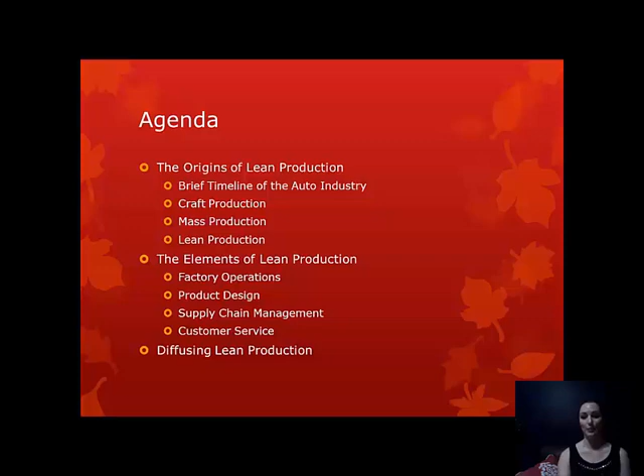The business model for these firms that were producing vehicles in the craft method was to have a central entrepreneur working with clients directly and then outsourcing each of the parts of the vehicle to small machine shops within the local geographic area, and then they would assemble all of those parts. These workers that actually built the different parts of the vehicle were very much highly skilled. Some of them went through apprenticeships and different things. A modern day example of craft production would be Aston Martin, very high-end, luxurious, handmade, high-quality product.

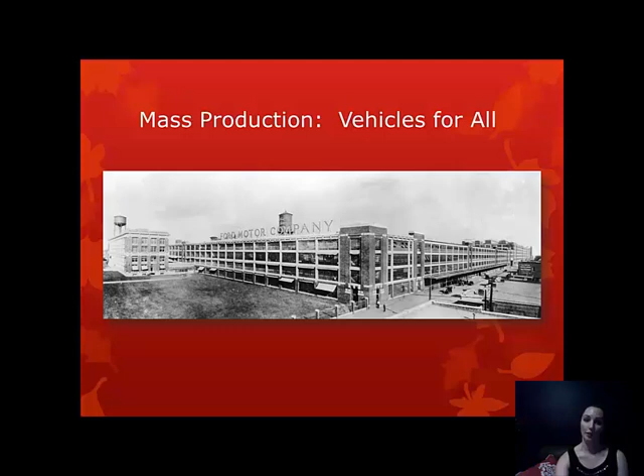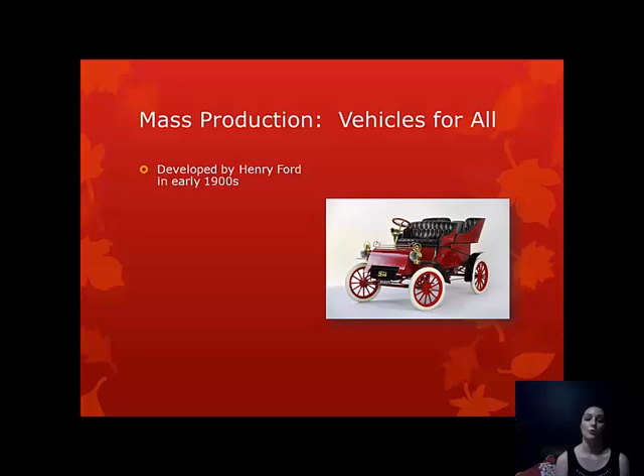So mass production came into play in the 1900s, and you can see this shot of Ford Motor Company in Highland Park. It was developed by Henry Ford, really, and here's the Model A, which deployed in 1903. And between 1903 and 1908, a variety of vehicles were developed, and finally we landed with the Model T that you can see here.

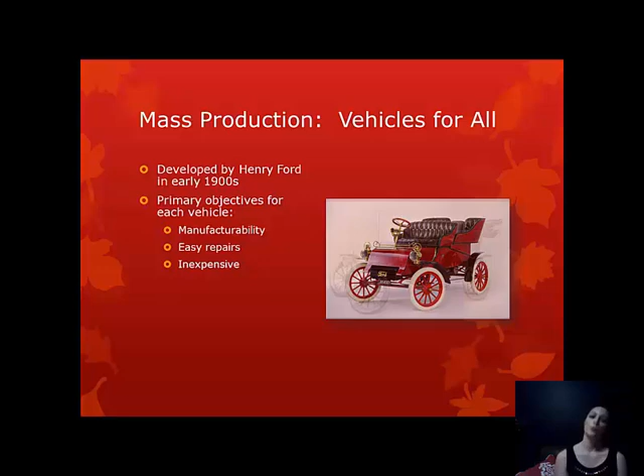The primary objective for vehicles that were created under mass production was manufacturability, so the ease of the workers being able to put the different pieces together instead of having to do a lot of skill-intensive work. Easy repairs for the user, so each vehicle came with its own little manual, and it was thought that anyone with their average box of tools could really just take out a couple, work on the car, and get it back on the road. Also, very much key is inexpensive. They really wanted to exploit the economies of scale and carry forth that cost savings to their customers. And they did that. Since the launch of the Model T in 1908, the prices dropped continuously.

Also, their business model, unlike craft production, is unskilled workers, considered interchangeable. These workers did not need any kind of special training. It was really more of a 3-minute training to know how to put one piece together with the other and move the vehicle forward. They did focus on quantity over quality, kind of a move the metal mentality, and a good enough attitude. So, origins of lean production.

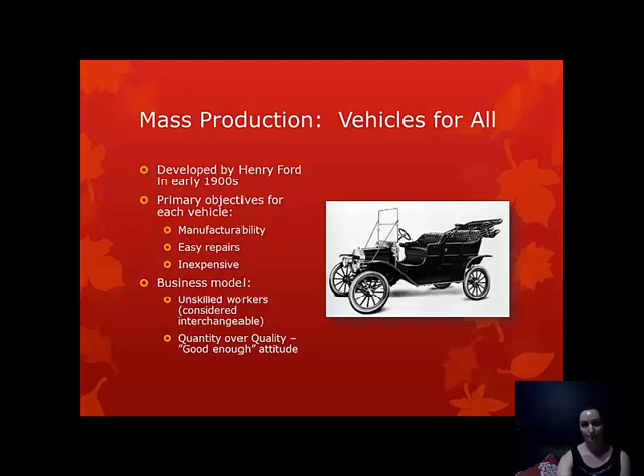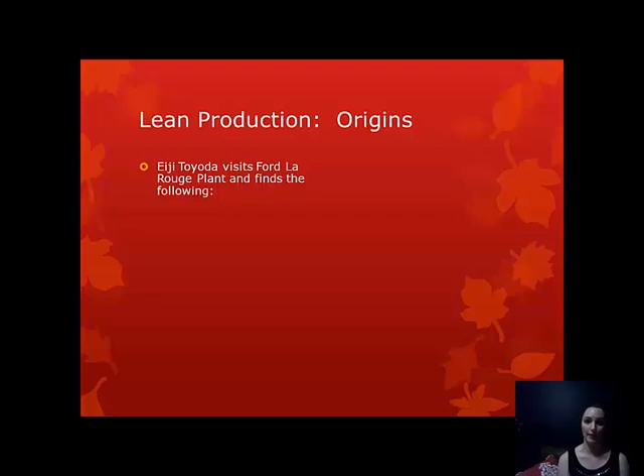Eiji Toyoda of the Toyota Motor Company visited Ford and found the following there. Extremely high volume of vehicles that were produced, hundreds of specialized machinery, a lot of these doing just one operation, perhaps on multiple parts. Interchangeable assembly line workers, as we discussed, and workers that do not add value to the final product, so they had layers of individuals apart from the assembly people who were working directly on the vehicle. They all reported to a leader, who might have reported to another leader, etc. They had industrial engineers, quality specialists, die changing specialists, etc.

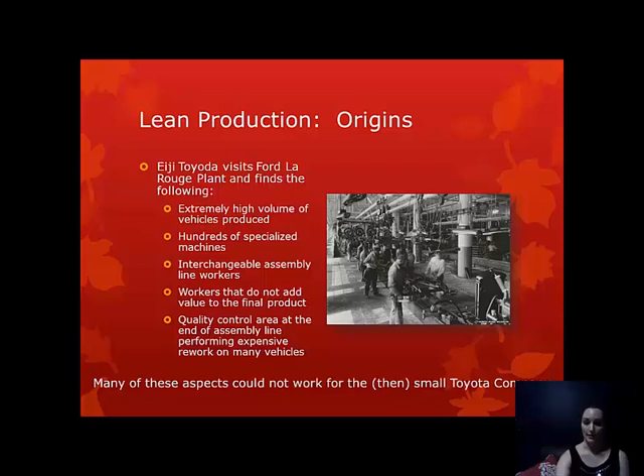Also, a lot of rework being done, very expensive rework at the end of the assembly line. So with that move the metal mentality, it was, if there's a defect, it'll get caught at the end. Just keep moving type of a scenario. So many of these aspects would not work for Toyota at that time. They were small, they had a lower operating budget to work with, so they developed their own concepts that sort of played into some of those mass production concepts. And so here we have Taiichi Ohno, and he with Eiji Toyoda really developed all of the Toyota production system, which is essentially lean production.

So the first example we'll give is SMED, single minute exchange of die, and this was a huge difference from mass production, being that they focused on economies of scale, bringing that efficiency, and they had a full day to exchange a die, whereas Taiichi tinkered for a long time and finally figured out how to take that time down to less than 10 minutes for exchanging these dies, which allowed him to produce much smaller batches of each part.

So as opposed to a plant like Ford, where they're producing thousands upon thousands of these pieces, holding them in inventory, which is very expensive, or perhaps producing some defective parts, and you might not even figure that out until you're halfway into this 1,000-part batch. So they had a lot of savings by switching to those smaller batch sizes.

Japanese unions gained a lot of power and authority during the time of lean production concepts being developed, and with that came the company as community. These workers were not willing to accept being interchangeable as they were in mass production, and they really were looking for an employer for life that would provide them with fulfilling work and honest wages and things like that. And Toyota really provided that for them.

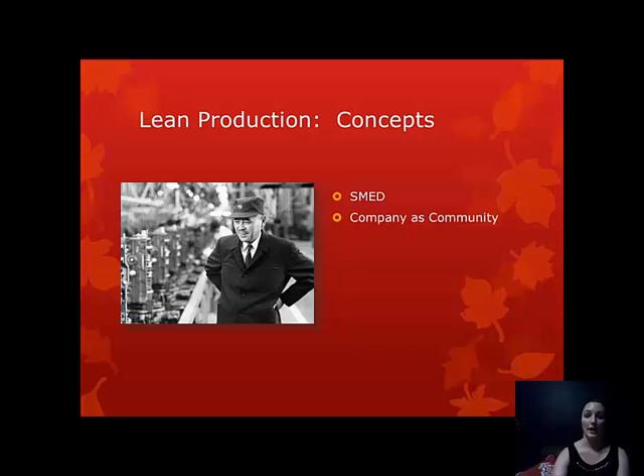They did guarantee employment for life for their workers and expected to get just as much out of them as they were giving to them. And so oftentimes they would work together on Kaizen, process improvement projects, and think of opportunities for improvement within their direct work area. They worked on things like eliminating waste, MUDA, as we all know.

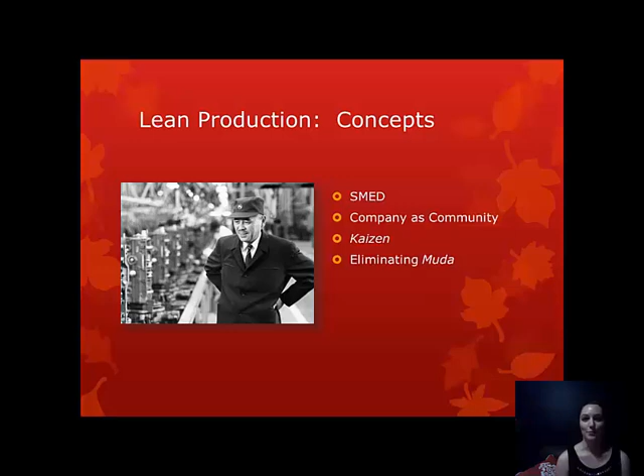I'm sure a lot of these concepts are familiar to us since we went through the ASQ session a few weeks ago. And one example of eliminating MUDA was eliminating some of those layers that we talked about that some of the mass production agencies had. So behind the actual assembly workers, they all reported to someone, had different specialists and things like that. So Toyota really eliminated all of that and put the ownership right on those assembly workers to give them more fulfilling work, knowing that they could live up to those expectations.

Also, they sought perfection. So whereas Ford had sort of a good enough attitude, Toyota was always looking to have the best quality, do it right the first time. These are definitely concepts of lean production.

And one way that they did that was they had cords above every workstation, and any time that an issue came to one of the stations that they could not solve immediately, they were to pull this cord, stop the entire production assembly line, and everyone would kind of huddle up and talk about, okay, what is the root cause of this scenario? They would do the 5 why analysis, figure out what it is, and solve that problem at its root cause so that it would never happen again.

So finally, the last piece we'll talk about is Kanban, and that's really the essence of just-in-time. So they actually have a very simple method that they implemented: they had a bin of parts, and once that bin got to your station, that means it's time to be filled with parts and move on to the next. So you weren't producing things unless the stations in front of you were ready to take those items and process them further. So really only getting the items when they are needed.

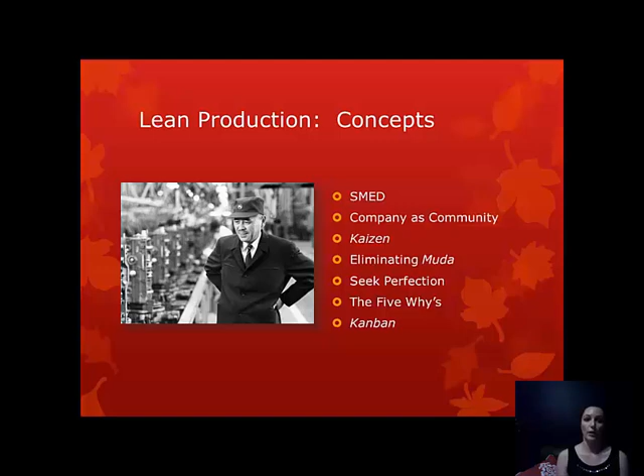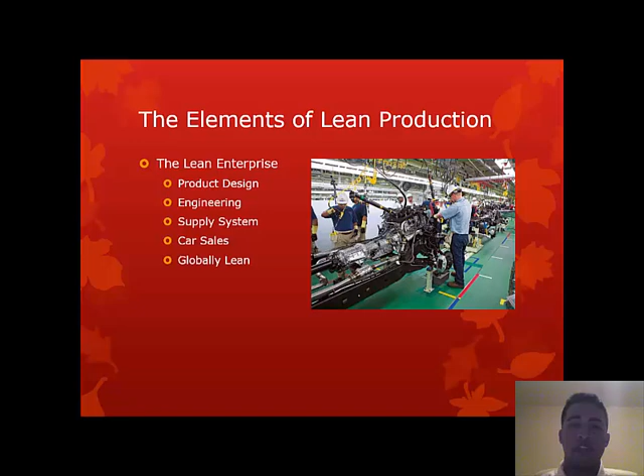Hi, I'm Doel Salcedo, and I'll be covering the elements of lean production. We'll be discussing product design, engineering, supply system, car sales, and finally the globally lean supply chain. For running the factory, the authors did a comparison between a classic mass production and a classic lean production assembly plant. The first one, GM in Framingham, Massachusetts, and the lean production plant over in Toyota City in Takaoka, Japan.

Now, when it came to designing the car, you can see here the time differences between lean and mass production. Lean required almost half the effort to design and produce a new vehicle that the mass production system did. Additionally, the SHUSA was the project team lead for lean, a person who owned the vehicle through the product life cycle, from inception all the way to death.

Additionally, that SHUSA's team was a team of employees that were with that product for the life of that vehicle. Now, in the mass production arena, the team leader pulled together temporary employees and kept pulling together as many people as he needed as the product got further along. All these people, however, didn't have any strings attached to the vehicle and were returned to their regular permanent jobs once the job was completed. They did not stay with the vehicle for the whole life cycle.

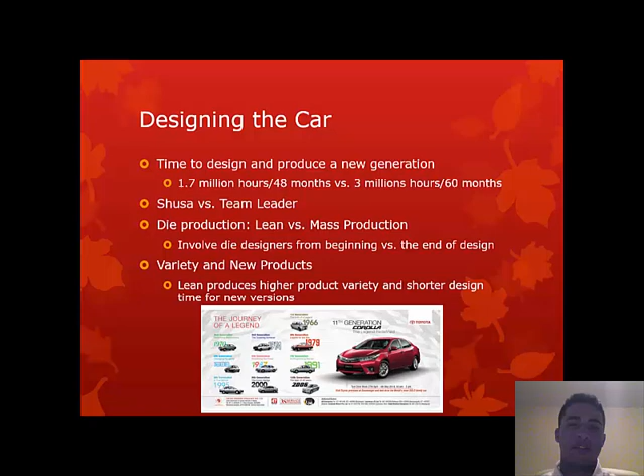Now, for coordinating the supply chain between assemblers and suppliers, you saw that Toyota had semi-autonomous suppliers, where these were semi-independent companies that worked primarily for Toyota, but had business with other companies as well. Now, with mass production, GM pretty much owned their suppliers. Ford owned their suppliers, and they were small little branches of those motor companies.

Now, for the scope of work, Toyota would allow the suppliers to go ahead and design end items such as seats and dashes, whereas the mass production system would require that assembler to create design drawings themselves before giving it to the suppliers. This again added more lead time onto creating the actual end item that would be supplied for assembling the car. Additionally, there was an issue between trust and transparency.

In the Lean system, there's complete transparency, so you know exactly how much it costs the supplier to make the part and what their profit will be. This allowed mutual profit sharing and allowed for each supplier and assembler to maintain a better business relationship, where quality was the concern and cutting costs was the concern. Now, in the mass production, it's all about getting the lowest bid as possible, get your foot in the door, and then raising your price every year in order to make back the money you lost in your first year. There's no trust at all between the assembler and the supplier.

Finally, the importance of quality is there as well. When we talked about just in time, if a part doesn't show up and is not correct at the right time, the right place, it's going to mess up the entire inventory and supply system. So this is extremely important in the Lean area.

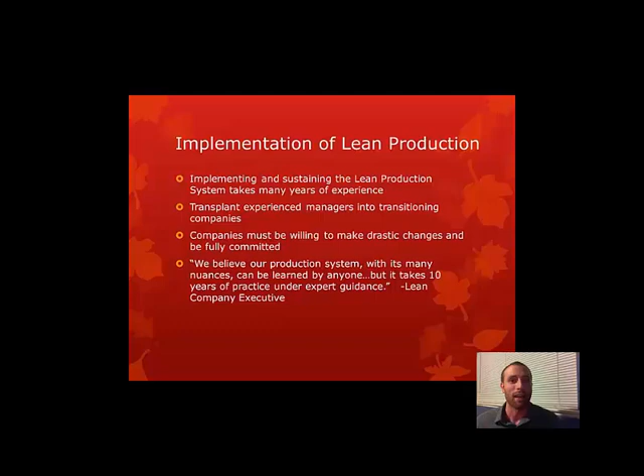So another aspect of implementing lean production is removing workers from the system. So after you've implemented lean production ideas into a manufacturing facility, it's naturally going to get more efficient. So you have to remove workers in order to keep the work pace the same. So everyone needs to be working still at a brisk pace so that that same level of effort and desire for improvement still exists. So the basis of lean production is that the employees, the workers, are the ones that help come up with ideas for improvement.

So if they're not having to work as hard because there's too many people there, so their level of effort isn't high, then they're not going to put a lot of thought into improvements to make the system better. So that is absolutely essential, is to keep the workforce only at what it's needed and not extra.

So the natural question to that would be, well, then what do you do with all these workers that you've removed? And the book suggests retraining them. So train them for just other skill jobs within the company, or a job in even a different industry or with a different company.

So it's not answered very well, and to me this seems like a big issue with lean production, and one that's not answered very clearly as to what we would do with all of these extra workers if lean production were rolled out widely all of a sudden. There wouldn't be really many places for these workers to go. So that's one issue I've seen with implementing lean production on a large scale in Western countries.

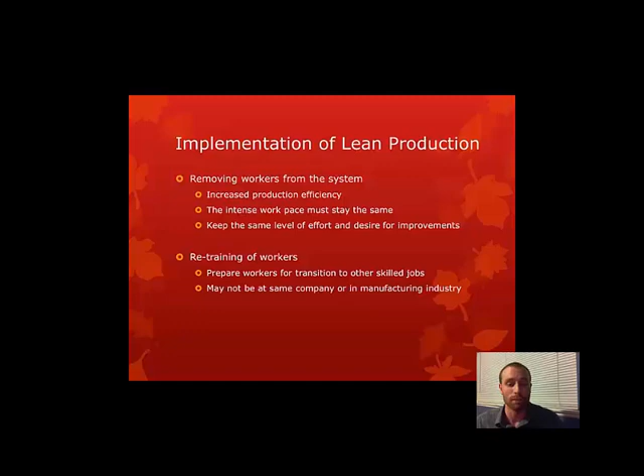The last thing that I want to talk about, to kind of wrap things up, is how the lean production system behaves in a cyclical market. So the first thing that Japanese companies do is they establish what's called a reciprocal obligation. So what this is, it's establishing a relationship where workers know that they share the same fate as their employers, and that suppliers share the same fate as their assemblers.

So what this does is it creates kind of a team spirit between the two to make them work together better for improvements and do whatever it takes to survive and to keep profits up. The second thing that Japanese companies do is they pay their workers largely in bonuses. So what this does is it gives a lot more incentive for each worker to try and improve profits, because that would directly increase their bonus.

And the second thing is it makes them feel kind of tied to the company, because they know that if the company does poorly, their wage is going to be cut. And so obviously they don't want that, so it kind of, again, makes them a team with the company and always pushing them to make the company operate better.

So the third concept that kind of goes along with this is that when the market slows down, so in a cyclical market, there's ups and downs. When it goes to a down, they can keep production the same. And the way they can do that is because they can cut prices.

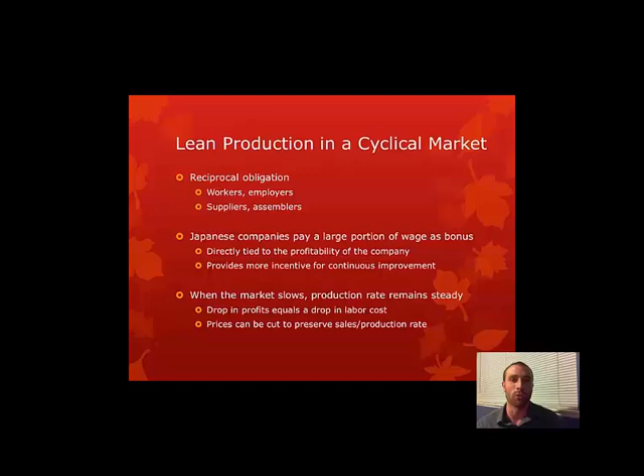So this is pretty controversial, and this runs into a lot of issues because it's never been tested. So the Japanese market doesn't behave like the United States market. It doesn't have huge oscillations up and down, and so this has never been tested to see if workers are willing to take these kind of pay cuts and stick around.

So during this time period, that's when the West saw how well the Japanese were doing and started to pay attention to lean production and actually started implementing some of their techniques. So this was kind of the stepping stone that really kicked off diffusion of lean production into the West.

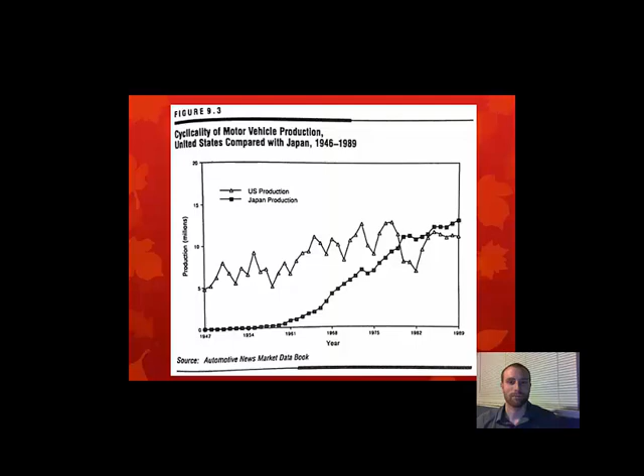Well, that concludes our summary of the book, The Machine That Changed the World. Just to recap on some of the points we touched on today. The first thing we went through was the origins of lean production. So we did a brief timeline of the auto industry and then went through the different types of production techniques that existed. Next, we went on to describe actually what lean production is.

So we talked about how it feeds into factory operations, product design, supply chain management, and customer service. And then finally, we went through diffusing lean production. So we talked about some of the roadblocks that are preventing lean production from being implemented, how to actually implement it, and then how it behaves in dynamic markets after it's been implemented.